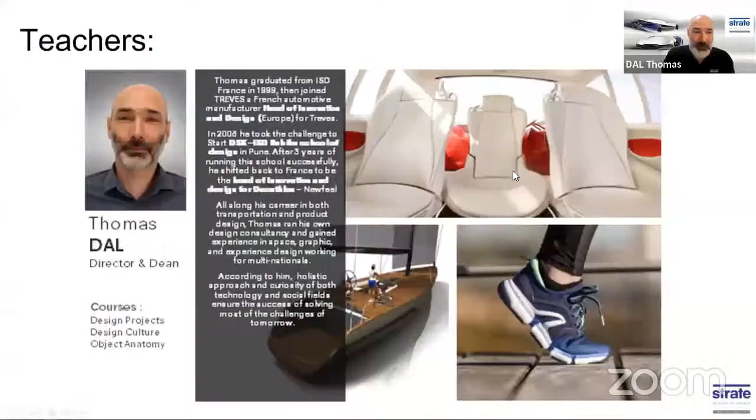So Diane introduced me, so I'm not going to go there. It's been 25 years that I'm doing design in different fields, but I'm going to speak mostly about Strate.

Strate believes that design is not just a job, like accounting — when you're an accountant, you go to your office, do your accounting, and when you stop your job you come back home and do your human life, okay? But actually design, we believe in Strate, is done differently. Design is a way of living.

When I stopped working for my company as a designer, you're still a designer. Your brain is still looking at objects. I'm going to be looking at this mouse to see how it has been done, what are the shapes, what is the reason, how is the manufacturing process. When I discover some cars, I'm going to look at them in a design way. So design is more art of life — it's more than a job.

Design is a transformation force field. It means that everywhere design goes, there should be a transformation of what's happening there, embodied by demanding professionals, readers, and thinkers of complexity. Because we believe you can't be a good designer if you're not aware of everything in the world, not just being able to sketch. Being able to sketch makes you an artist, but being able to think and understand the world makes you a designer. So you need to be a reader, a thinker of complexity, because the world is more and more complex.

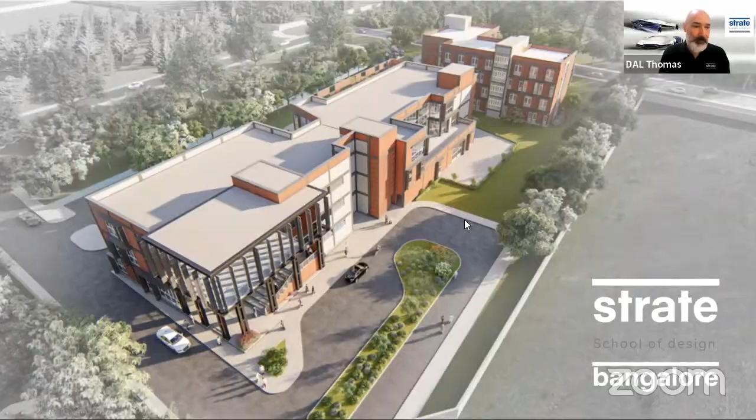So what we offer in Strate is a BSc and an MSc in design from India. Plus, if you want, there's a procedure to get another master from Paris by spending 3-4 months there. So instead of doing 2 years again, you just do 3-4 months and get a master, which will be RNCP level 7, the European coding for a master in design. It's a skill-based official graduation that you can get from Strate Paris itself. So after 5 years in Strate Bangalore, plus 3-4 months in France, you get 2 masters, one from India, one from France.

And we are training the students to be experience designers: service designer, space designer, system designer, interface designer, object designer, car designer, everything. We'll see that a little bit after.

So we've got 4 design departments. Mobility is actually 5, I should have changed this. It's changing. So mobility design, which is car designing, but not only cars. We are going to speak about that today, so I'm not going to go on this.

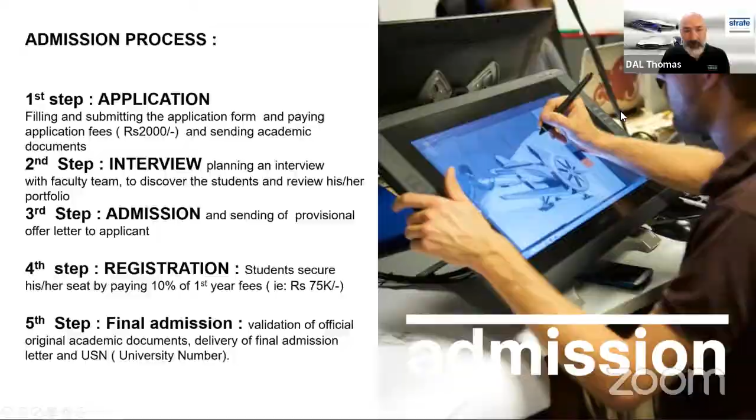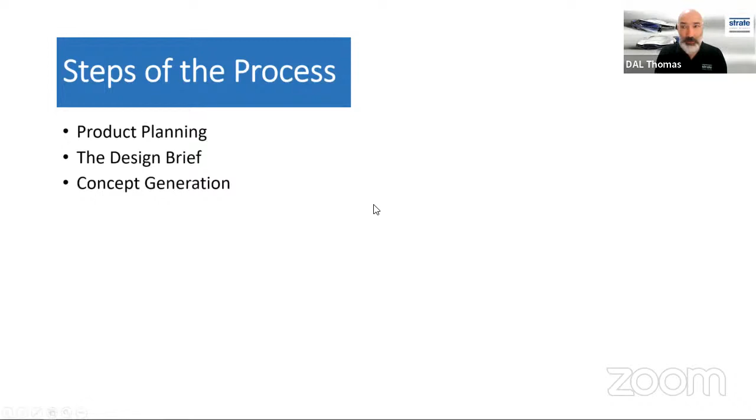So the design brief will be an explanation of what is expected from the designers. After that, there will be the concept generation for the designers, team selection, 3D computer model generation, design evaluation, styling freeze, and prototyping. We are going to see that in the coming slides.

So for product planning, people are going to do market research in order to understand what is sold, what is not sold, and what are the reasons, in order to understand what car is going to be produced next.

Then what is the capacity of our factory to build? What can we build, what can we not build? Can we build a 4-wheel drive or not? Or can we build an EV or not? What is our industry's possibility to make a car?

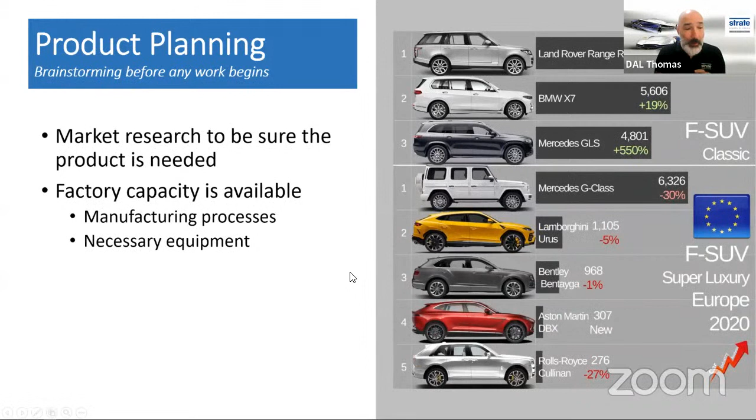And after that, they will come to the design brief. It will be the guidelines about the design of the vehicle that is going to be designed. So it's going to be identifying who the car is going to be built for.

The new Series 3 of BMW - is it going to be for younger people, for 30s, 40s, 60s, all of them? So what is the trend? Who are the people - are they going to be rich, not rich, sporty, classy? Are they going to be driven, chauffeur-driven? So all this is going to tell you what kind of car you need to design.

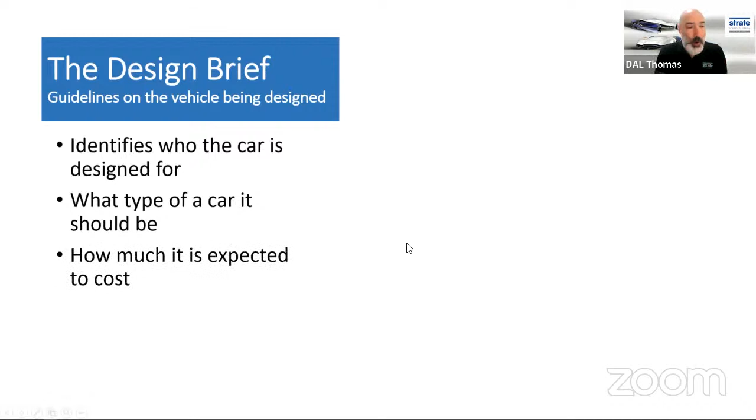After that, what kind of car is it? Is it a limousine, a sport car, off-roader, an SUV? What kind of car should it be? How much is it expected to cost? How does it fit into the brand family portfolio? Because if you've already got a Series 5 and a Series 1, the Series 3 needs to match and not be too close to the Series 5, not too close to the Series 1, and how it fits inside. So all this is really, really important to describe before giving it to the designer.

And the trend analysis - what is the trend? Is it going to be rounder? Is it going to be more edgy? Is it going to be more shiny? Whatever the trend is, you need to be sure that when you design a car, you're going to meet what people will expect from it.

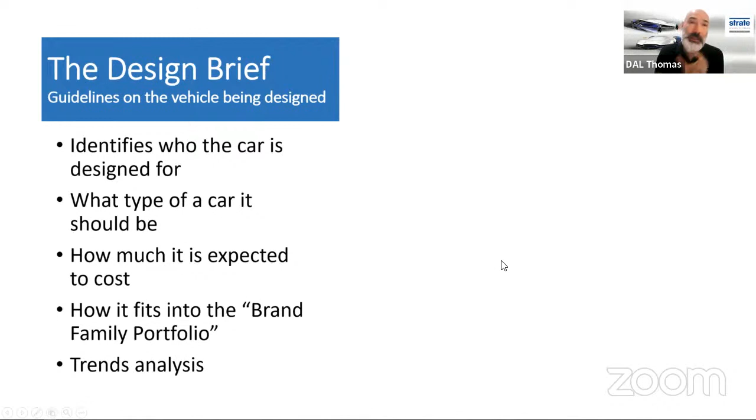After that, there will be an internal competition. This brief is going to be shared with all the designers of a brand that are available, the ones not already working on a project. There will be 20, 30 designers, interior and exterior included, given the brief, and they will have 1 to 2 months to work on this and get a proposition to the company. It's an internal competition because out of these 30 propositions of design, only one at the end will be developed.

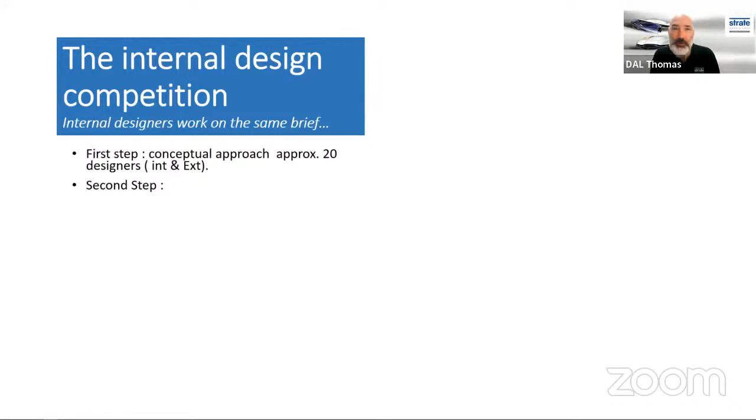Okay, so how does it work? The first step is we give these 20 designers the subject. The second step is they showcase it in a room - I don't know why the images aren't showing, but whatever - and the boss of design of the company and all the important people come.

Out of these projects, they are selecting 5 designers for interior and 5 designers for exterior to develop their concept further. All the others will go back to different tasks. After that, these 5 designers for interior will showcase again the continuity and refinement of the work, and only 2 projects for exterior and 2 projects for interior will be selected.

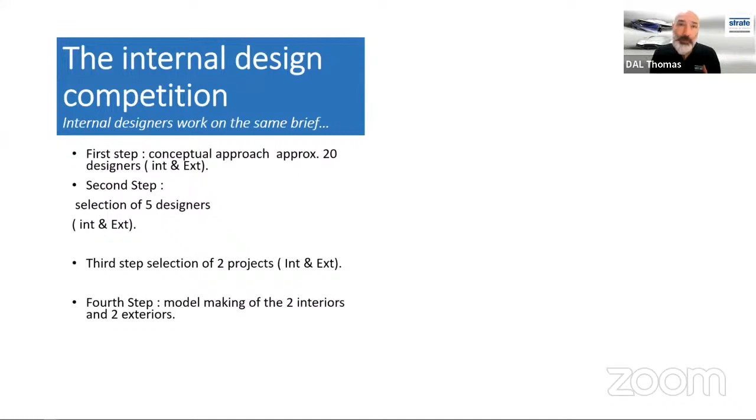These projects will be made in 3D and in clay, 1:1 scale. They make a clay model in order to select what kind of cars there are. Out of these two, at the end they will select one direction that will continue as a project for the car. So this is the internal funnel of the competition in order to decide which kind of design is going to be continued for a car.

So in a company like Renault, for example, they've got nearly 200 designers. There are some designers that never have their cars built because they are never one of the selected ones. And you've got very good ones that are always winning every competition they do and building cars after cars after cars. The ones that are not winning join the team led by the guy that won the competition, and work under him to finish and work on his concept to make it real at the end.

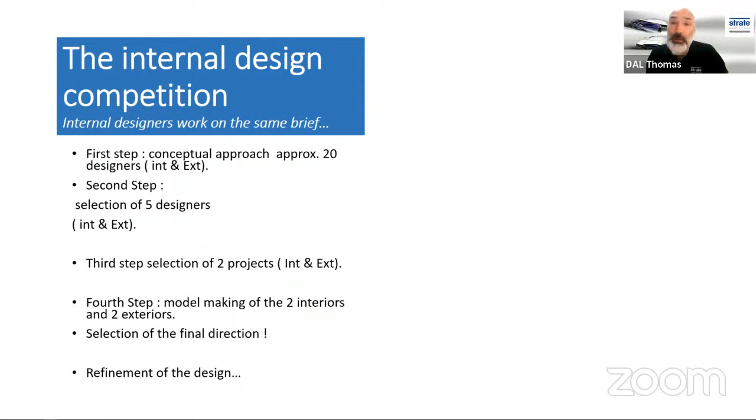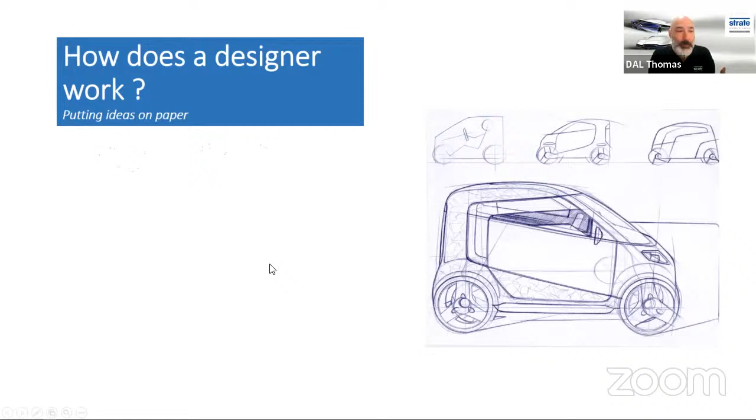So how does a designer work during this design challenge? First, they've got some ideas, so they put some ideas on paper. They do some basic thumbnail sketches to start with, in order to get some ideas, some icons of what they want to do. After, they make some more detailed drawings. Generally what happens is the exterior design comes first, and after that we do the interior.

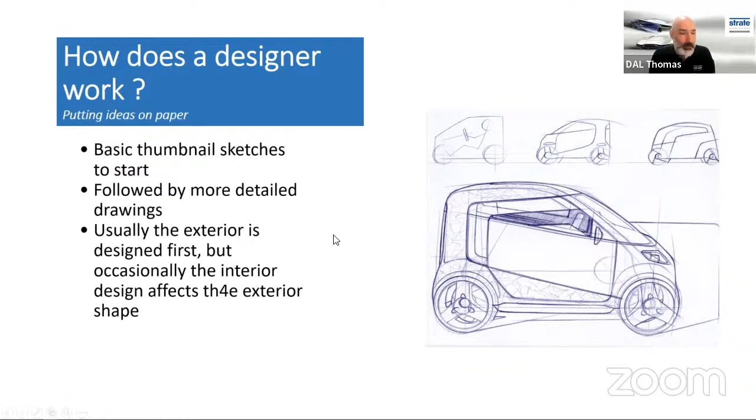But it's changing now. The trend is changing with the automotive industry, with autonomous cars.

After that we go for mood boards. A mood board is very important when you're a designer, because when somebody gives you a brief, you need to understand it. And in order to understand the brief, you need to refer to what kind of shape it's going to look like, what kind of colors, what kind of material — if it's glass, is it going to be shiny glass, frosty glass, what kind of frost, deep frost or not, is it going to shine from inside? All these kinds of details are in your brain, but it's difficult to communicate. So making a mood board is the first thing designers do in order to sharpen their understanding of the brief.

And to be limiting the possibilities for them, because when you're starting a project from scratch, it's very easy to get lost in the millions of possibilities. By narrowing down, by putting together a mood board, you establish that this is what I need to do and I should not do something else. So then after that, when you've got your mood board set, that this is what I should need to do and not something else.

You start the ideation sketch. This is the kind of drawing you will find in order to get some ideas to make your car working. After that, when you've got a clear idea, you go with refined sketches, where you start to put lights and shadows to show how the shape of your bodywork is going to be refined. In these details here, it's more about the proportion of the car and the stance of the car.

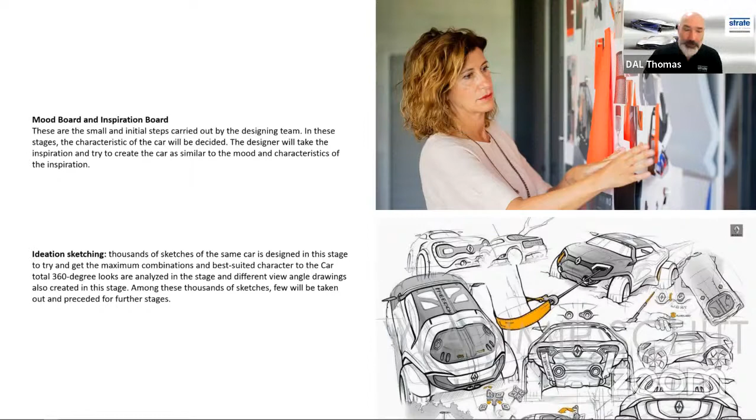Here, when you go to this level of detail, it's more about refining the surfaces of the car. Is it going to be flat? Is it going to be a little bit rounded? Where are they going to flow, and things like that? And after, when you are good with a team, with markers, you go to refining this on digital markers.

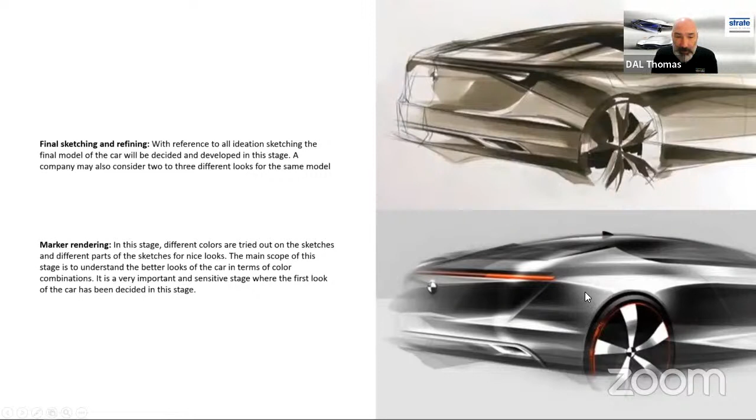And you come with very detailed surfaces where, when you look at them, you can really understand how the surface is. Here, if you follow my mouse, you can understand the surface going up. There's an edge, rounded here, then flat. Here there's a small edge going inward, then it's bumping a little bit outwards and going inside. You understand with the reflection — the colors are not just there to look good. They are here, and the drawing is here to make you understand the surfaces of the car, and how the tools are going to have to work to stamp this body.

Okay, what is the shape? After that, you have to do a technical rendering. It means showing the car.

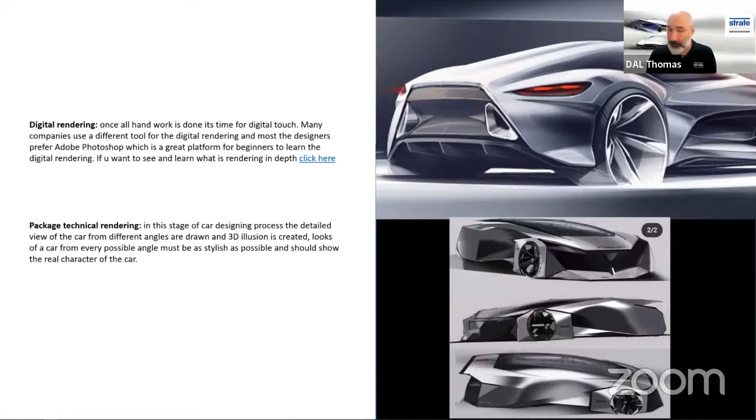Once you've got this done, you can go for the clay modeling. You use your sketch, like you can see here. This is what we do at the school. You use your sketches to shape and start to sculpt your car in clay. It's called industrial clay, and you shape it with blades called slicks, which are spring metal that you pass over the clay to scrape it and shape it.

When you've got your clay done, we 3D scan it, and with all the data we get from the 3D scanning, we build the car in Alias. This is what we do in the school, but in real companies you are not doing this as a designer. There will be a clay modeler that does that.

So he might be the clay modeler, and you will be the one telling him, no, please, this is too round, this should be more tense, this edge is too narrow, it should be there. It will be a collaborative work between the clay modeler and you as a designer.

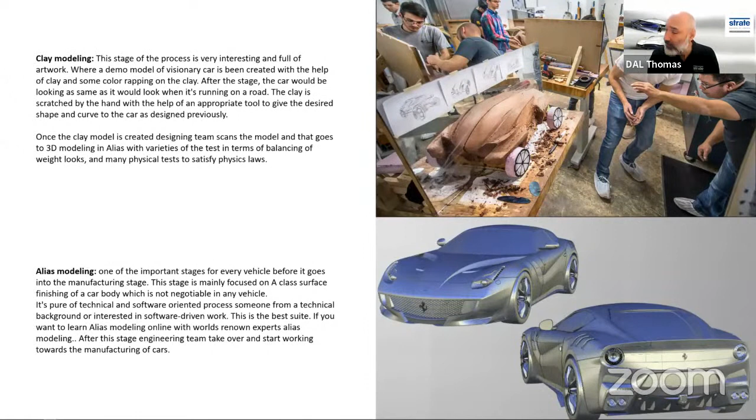Same thing with the digital work. In the school, you will learn to do it yourself, but in the real world, you will be working with a digital designer who does the digital work. When you come to check with him, you'll say this is too flat, this is too round, this is too edgy, this should go there, this line should be refined, all this kind of stuff. I'll be managing this team and the project with him.

After that, when everything is done and we're at the end of the competition, if you've won, we are going to select your team's car. With all this work at the back, we're going to look at your cars, and all the big guys of the industry are going to come to select them. They'll discuss and ask if it really matches the brief. You'll have guys from marketing coming to ask, is it the car they were expecting to sell? Is it matching your target people?

After that, you've got a very detailed design that's going to go to production. You are the winner, it's going to go to production. Then we make a really defined 3D model of the car that gets pushed to the engineers as well, because now that you've got this design of the car, which is called frozen, the engineers are going to start to work on it and say, okay, you've done this, you've done that, you've done that.

They might say it's okay, we can do it, but they might also say we can't do it, your door is too big, we will never be able to have a hinge able to support this weight, so you need to reduce it. So there will be discussions between engineers and designers together in order to change and evolve the design of the car, to make it real, to make it happen, to make it engineerable, to make it feasible. This is the work that needs to happen.

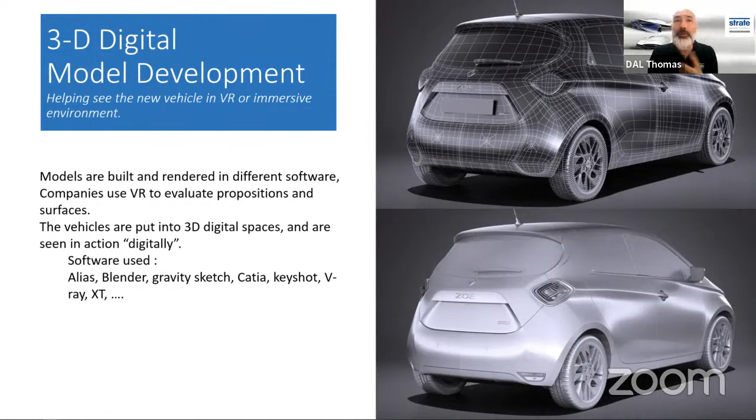There is a lot of software that you will have to know as designers, like Alias, Blender, Gravity Sketch, Catia, Keyshot, V-Ray, ZBrush, and all this kind of stuff. Maybe as a student you will use them to do your own project, but when you're in the industry, you just have to know them to be able to know what to ask to the people that are going to use them for you.

After, when the 3D is really accurate, we are going to use a milling machine. You know what a milling machine is? It's a machine that's going to sculpt the clay for you. You can see this here. Actually, this is a 3D scanner, but whatever, it's a machine that's going to sculpt the clay according to your 3D.

So you will have a prototype that is going to be machined out of clay. They use like 3,000 or 4,000 kilos of clay to make a 1:1 scale of a car, like you can see here. It's a BMW, a Series 6 project.

When the machine has finished, there will be clay modelers that come and work on refining the surfaces. And you, as a designer, are going to check if everything you refined on the 3D model is looking good in real life on the real clay. Then you refine some surfaces, refine some edges, and things like that.

And then the process will start again. You will scan the 3D, it will go back to the computers, you will modify the 3D model, then you will mill the clay again in order to be sure that the 3D model matches exactly what you are sculpting with your hands.

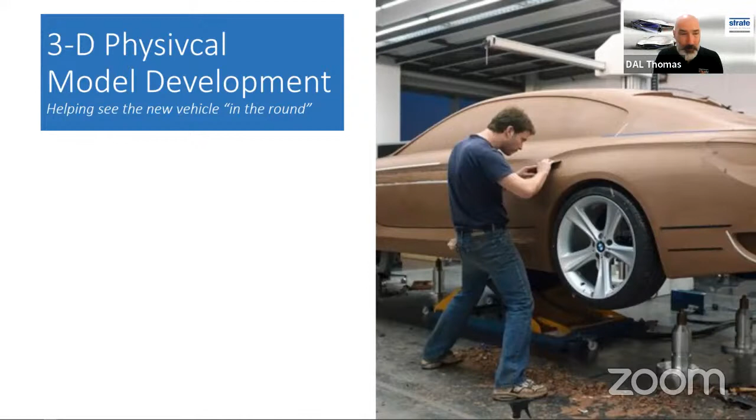And then all this is going to be evaluated with clients, customers, a panel of customers. It's going to be showcased to everyone, to the engineers, and then there will be a review. Oh look, if we do that, here there will be a hole of this much millimeters. Can we make it better?

Oh, the door hinge here, you know, it's an edge. The engineers say that there will be a radius of this much. How can we do it better? There will be a full review and evaluation of your design according to the constraints of the car.

Ergonomics is validated. The new vehicle is compared to other cars and potential customers are tested for reaction. 'Oh, I don't like it. I don't like the front. It's looking like a frog.' There is a lot of reaction that can come, good and bad.

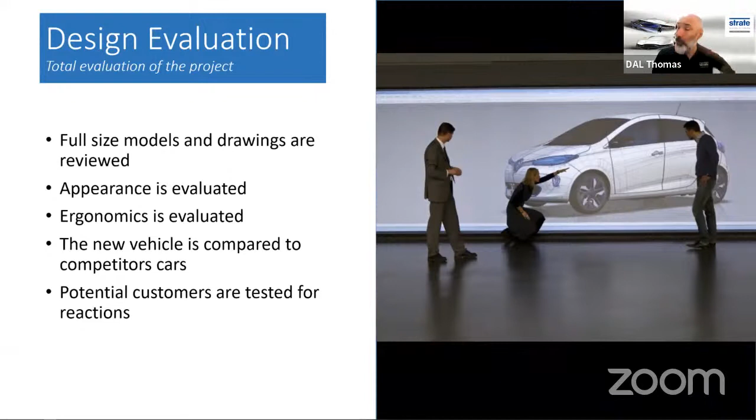And if there is too much bad reaction at this point in time, you go back to the beginning. After that, the design is completely frozen. This is what the car is going to look like. And everything here now, in terms of deadline, when you reach this point, you've got 2 years of work.

It is 2 years. After that, what's going to happen? We have here validated what kind of engine we're going to put in, what kind of suspension, how we are going to open the doors, and all those dimensions and everything. The financial viability of the project for the company has been validated.

All the changes that we are going to make in this car now are going to increase the delay and increase the cost. If I decide to change the way the door is going to open now, we need to go back and change everything, so it's going to increase a lot of time. So here is what we call a design freeze. This is what it's going to look like, and there's no change. Of course, there will be micro changes because of technology, but no big change.

And after that, we build the first prototypes of the car. It's taken another 4 or 5 months to build the prototype of the car, and we are testing them. We are going to the desert to have some super big heats. We are going to the cold to run the car in the cold. We are going to the monsoon place to get the car into a super wet environment, to see if there are some defaults, plugs that are not waterproof enough, the engine overheating, if the AC is working, if the heater is working, if everything is working.

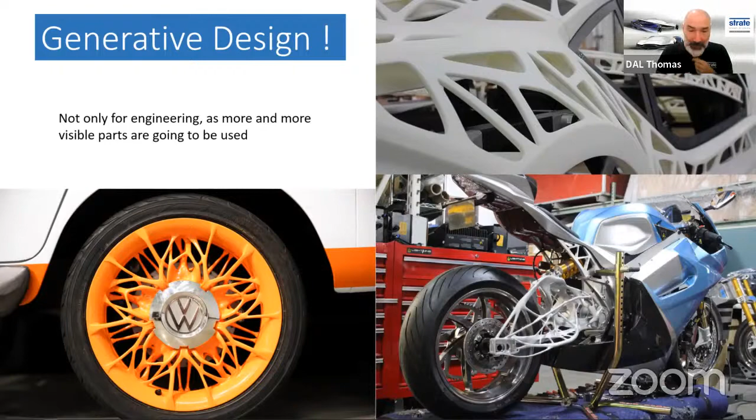Okay, I've got some sketches. How can I transfer them? You want an SUV? Okay, let me take all the SUVs, mix them, move them, and this is my proposition. And this is very, very interesting, because the work of a designer is going to evolve, and maybe the skill set necessary to design a car is going to evolve from being super good at sketching to being super good at working with a computer, to ask the right question to the computer to get the good result at the end.

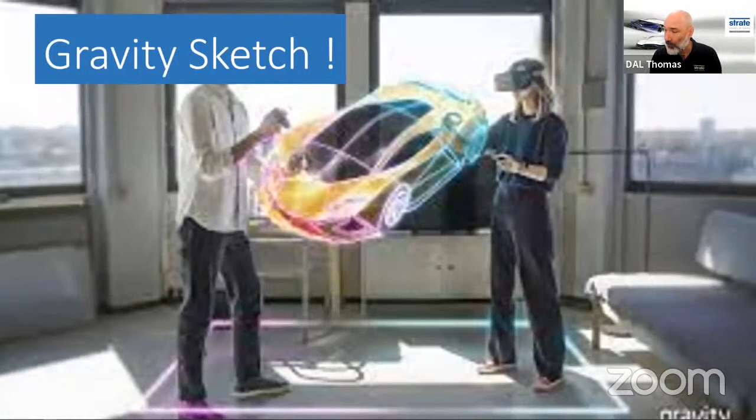So the work of a designer is completely changing. And another way it's changing is that you all know the softwares we are all using with the mouse, modeling in Blender, Catia, Alias, Rhino, Keyshot, whatever you name it. Sorry, the image is very bad quality here.

But we've got Gravity Sketch that is coming. It's one of them, of course there are many of them. Gravity Sketch is building 3D models in AR, augmented reality.

This is something that designers need to know now. At Strate, we've got Immersive Lab, where we teach our designers to build in 3D in order to be sure that when they reach the industry in 5 years, our students will be the ones saying, 'You want to do that? I can do it for you because I've been trained,' when other schools will not be trained on that. We are getting our students ready for all these 3 trends I gave you, because this is coming. And if students are not getting ready for it, they are already outdated. So be careful of that.

Be sure that when you choose your school, you choose a school that is going to give you something that is going to be valuable in the future, and not something that was valuable 20 years ago.